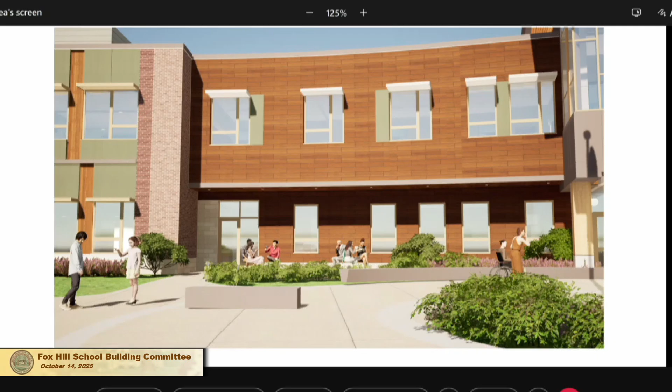This one is showing the elimination of the rooftop mechanical screen that would come off. Martha has a question - we can see your mouse, by the way. Am I correct that those screens are in the back of the building? You're correct. So those screens would not be visible to the public in general? That's mostly for kids playing out back, and it's not even where the delivery people come in, is it? So hardly anyone would see those screens. Correct me if I'm wrong, Neil, but it does look like it's on a roof that is lower than the central portion where you'd see from the front of the building.

Yeah, Martha, it's a one-story roof there, and the kids do play in that area. That's where the outdoor dining potentially is and outdoor learning. But it wouldn't be visible to the public generally? It wouldn't be visible from the parking lot, no. Okay, but if you walked around the building, you'd definitely see the ductwork and the units on the roof. So is that something we're talking about deducting, or? Yes, in theory. Yeah? Okay.

I think it's important to note that all these, maybe with a couple of slight exceptions, should not affect or impact teaching and learning and educational programs. They're very intentional so that they do not impact teaching and learning. So it's a good observation, Martha, on the back side of the building.

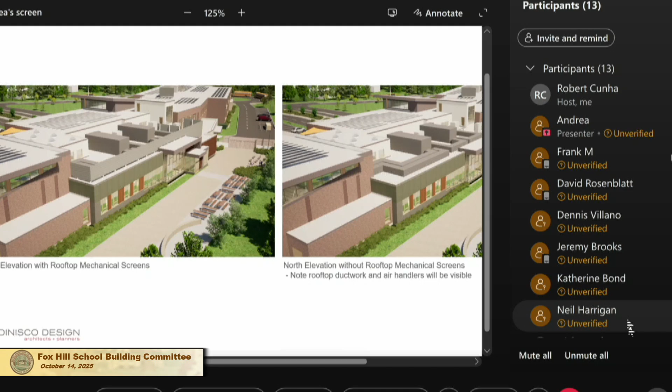Are you talking to me? Yes. I think this is one I would be in favor of eliminating. Not to mix up projects, but all eyes are on us financially - being careful with our money - and this one doesn't strike me as necessary.

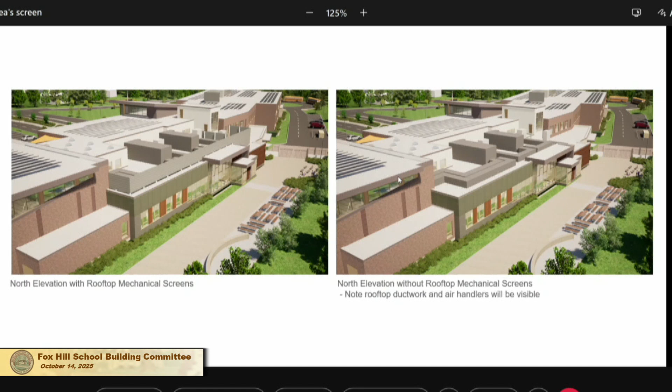So I've had the pleasure of working in a building that has these screens, and I think they're uglier than the units themselves. I don't think they're attractive. I've seen them on other schools too. I don't think they really do much for the aesthetics of the building, possibly sound, but it doesn't sound like there's really much of that benefit, and that would be the only benefit in my opinion. So I would be in favor of getting rid of these.

I didn't raise this earlier, but when you looked at the sunshades, I'm confused - is the idea that we're going to keep them? Martha, they're going to go through one by one. Well, we already did this one, and I'm just concerned - do those sunshades make the building more energy efficient? That's my question, and if so, I think we should keep them.

They do decrease the solar heat gain in the summer, which is a bigger load than in winter. In the winter, you usually need heat from the sun, so it is an advantage. I can't quantify it right now, but I could have our consultants put a number on it.

So is that on the delete list? It's a little hard for me to tell which is in and which is out. I think that one's... All these items are open for discussion.

So this one was averaging about $82,000. If you remove it - it's currently in the project. So all of these are in the project. Everything is in the project.

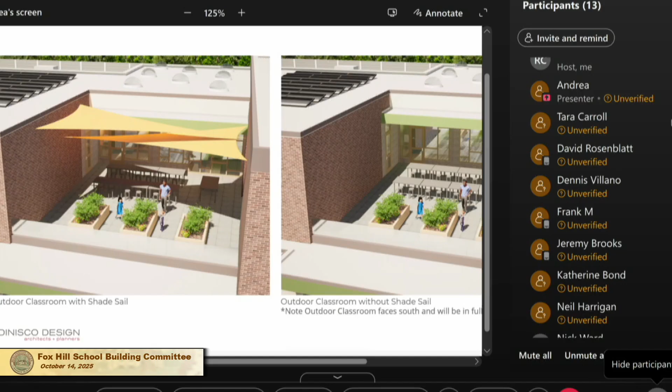Moving on to number 5, eliminating the operable partition at the platform. So that would be this - is it this piece, Neil? This doesn't show it, but it's essentially the opening where the wood is in the stage.

We have an operable partition that closes so that the stage area can be used as a music classroom or any other kind of classroom you'd like. So it would essentially come across right here. Does this help with sound in the cafeteria?

It's an acoustical partition, about STC 50 or so. I think depending on how loud it is in there, you might hear some of it, but the intent was to kind of isolate the two spaces.

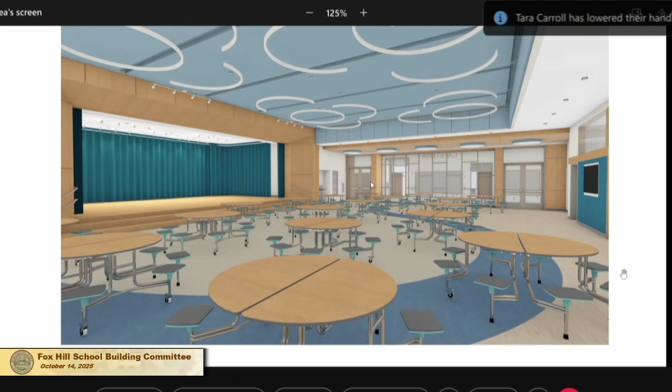My question is with moving partitions, how long do they last, and do you end up not using them anyway? We could spend the money on this and it seems like a good idea, but if it's going to break after a couple of years and we're never going to be able to use it, what would the advantage of it be?

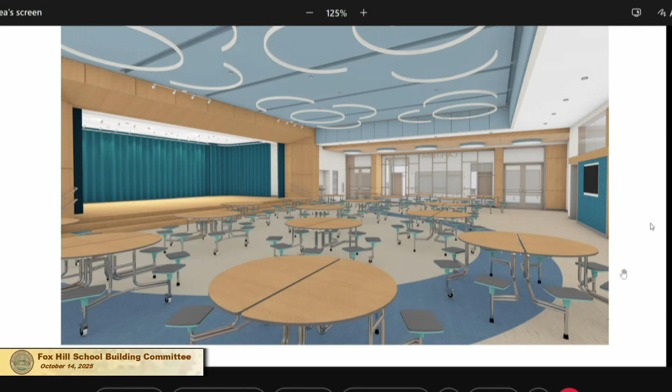I would say we've had good luck with this. It's an electrical motor-driven, continuously hinged partition. They are pretty simple devices, and everything's pretty accessible. We've done it in a bunch of schools, and we haven't heard of any of them breaking down as of yet, but I can follow up with the manufacturer.

Maybe you could give me some statistics on the typical lifespan of them and how frequently they break down. But I think in general they're kind of useful if you want an extra learning space in the school - it's an easy way to do it.

Thank you. And we use their stages a lot, almost every building, as learning spaces. So I would say that's an instructional feature that's already included that I think we should keep.

Is there a curtain on the front of that or no curtain? There's a curtain too, so when you use it for performances, you want to have a curtain. We also have a drop-down rear projector screen in conjunction with a curtain, like a large screen - you could show a slideshow or a movie on it.

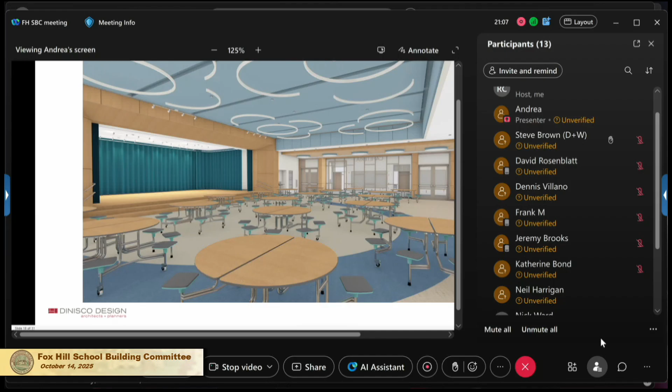Is your hand up related to the stage? Yeah, I was going to piggyback on Dr. Cunha's comment. When I kicked off the discussion on VE, I mentioned there's a few exceptions on programming. This one is kind of a fringe program impact because based on the number of sections of music, we were relying on the stage to have some of that musical instruction space.

And so without that acoustical separation, it would be really hard to do that - the noise and everything will carry right into the cafeteria. So that's why that exists. Yeah, I think currently they have all the strings and the instruments on the stage.

Thank you. My question was about the warranty on the electrical parts. I'm for this, I'm just curious if you don't have that information now, if you could share that with us before we vote.

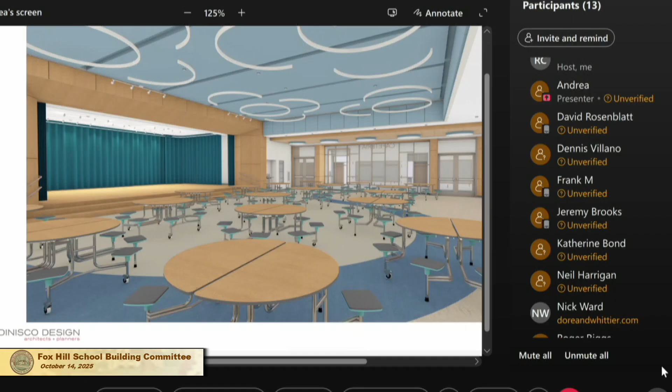I could definitely share it with you, I just have to do a little research. Okay, thank you - get it to you in an hour or less. Thank you. Sure. Okay.

Andrea, the delta on this is roughly 40,000, and the stainless steel is already designed in? Correct, it's a $42,000 delta. The glass is currently in the project - it would be a reduction to go to stainless. No, the glass is in, it'd be 40K less to go stainless, but may take longer.

Correct. Oh okay, I got that backwards. So the glass is the preferable one, that's the one that people prefer? Yes. Okay.

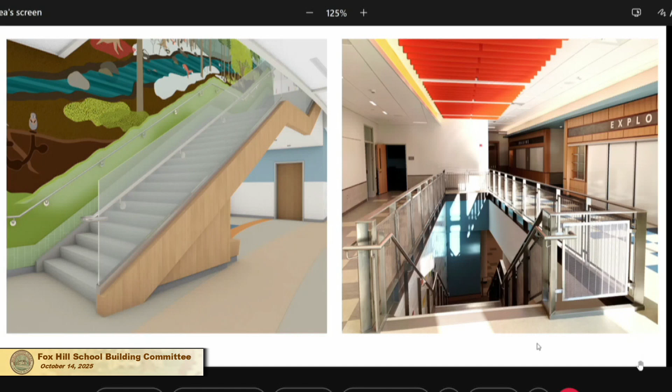Number 7, so we're taking this outside. We reviewed the grounds, and you can eliminate the flat drain system. It's in the project, but if you were to take it out, it would be a savings of around $345,000.

Martha asks: does this affect any of the requirements from the Conservation Commission?

I think I can answer that one, Andrea. I don't think it does. Really, it just allows the field to be used in wet conditions. If you're going to use the fields a lot, that's really useful, it makes sense to have irrigation and drainage.

I think what we heard through the meetings with recreation and school department is we anticipate the field getting used a lot or being available for a lot of town programs. So not only is it really nice to have, but it's been an ask from the committee and groups we've been speaking with. This one may need to be re-reviewed by planning board if it's part of the site and how the drainage works, but it drastically will increase the ability for that field to be used in the shoulder season.

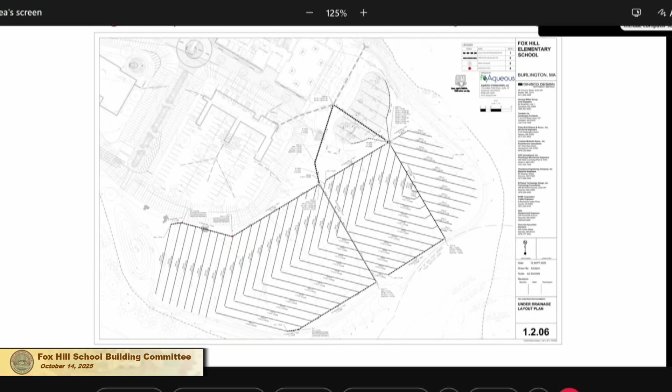Okay, well, let's stay outside with the next alternate to see if Jeremy has his hand up. Oh, sorry Jeremy. Oh, no, down.

So the next alternative option in the field is to eliminate the field irrigation system. It would make the fields less useful year-round. It currently is in the project, and if you do choose to take it out, it would be a reduction of $222,000.

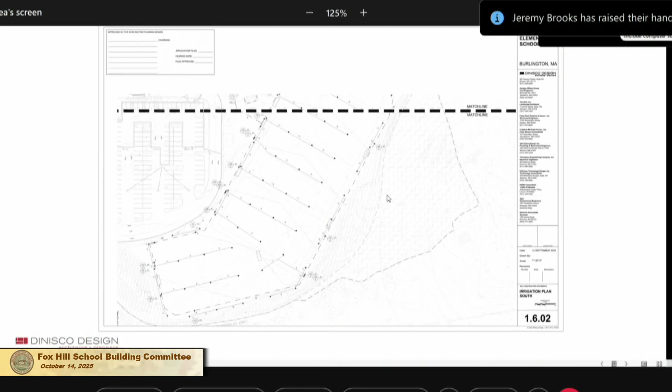Jeremy's hand is back up. I just wanted to make the comment that this was part of the Rec plan, and this is something we've been talking about - the overall scheme of fields for the town was kind of why we added the field as currently configured, with the drainage, with the irrigation, to get that full size lacrosse field. So that was something the folks had asked for, just to get a point of context.

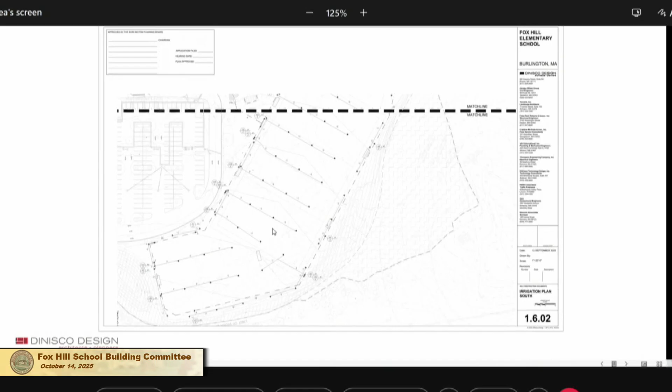Thank you. So what are the rough costs associated with maintaining the irrigation system? So we'd be adding maintenance service or cost right now? Nothing like that right now, unless plans change - Recreation maintains the irrigation system. Okay, so they would incur that cost. From other conversations with Rec about maintaining irrigation systems, it's mostly occasionally they have to replace pop-ups and valves, and it's a fairly low level of maintenance over time.

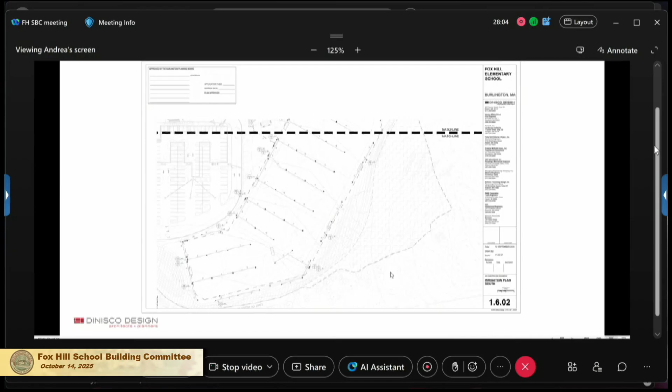And it keeps the grass probably maintained even better than them having to redo it. We have plenty of weeks where there's no rain or no water on the fields, and it definitely helps - yes, the grass would get burnt out in the sun and kind of unusable because it would get torn up. Without both the drainage and the irrigation, you'd have a very unreliable field that was very unreliably available.

Okay, thank you, we'll move on to number 9. This one is eliminating the soccer and lacrosse goals that would be supplied as part of the project. My only comment would be that someone would have to buy them later on. Yeah, and this is again in the project, and I think this is one of our smallest eliminations at $30,000.

Unless you have a source or somebody in town has a source that can get them at a discounted rate below that, it's one of those things - if you were to exercise the option to remove them from the project at this point, it doesn't mean we can't repurchase them through FF&E or that budget later. A lot of these things, usually if we're really trying to get down towards a number to just keep the project alive, to keep it under our budget, we're just in such a different position. And I will be the first to acknowledge the fact that everything going through town meeting with the high school does change the conversation somewhat. But that's why a lot of these are pretty standard value engineering options available, and why it's included here.

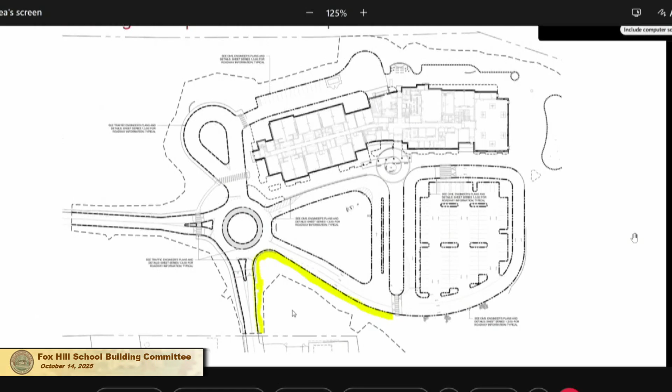The berms don't last, so again, that's been my observation. The snow plows kind of knock them up. So if we have granite now, I would like to stay with it. I agree. Agreed. Granite really is the gold standard, especially where plows are involved here in New England. Thank you.

Again, I'm selfish, I consider that programmatic, so I'd want to keep it. Yes, this is one of the ones that Steve mentioned at the beginning that would affect the use of this stairwell.

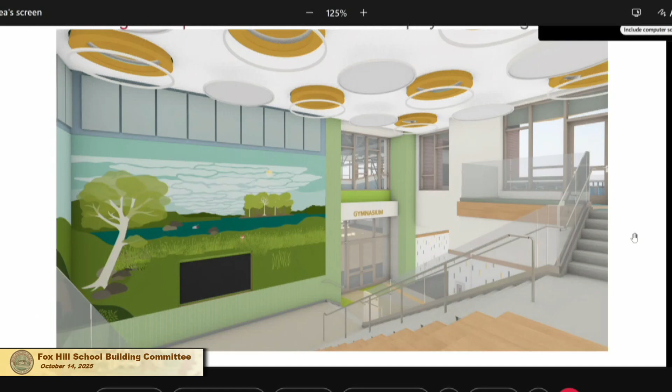Question: is the outdoor learning classroom MSBA reimbursable? It is in the sense that it's tied to the construction of the building. It's not any one particular line item, it's kind of in the construction number. Okay, thanks. It's not, they didn't rule it out.

No, they didn't exclude it, it's a really good point to highlight. As we get deeper into the discussion about whether we're looking at some of these, all of these, or none of these, there's an impact on the grant for the ones that are site related, because of the way the MSBA math works, we're already over our site cap. So if we were to eliminate anything site related, those are dollars the town is bearing 100%, because we're so far above that cap, which is completely normal. That's just the way MSBA agrees to reimburse exterior site work, because it's less tied to educational space. That's where they draw the line in their program. But things in the building and in the construction would very much potentially reduce the grant by their reimbursement percentage on eligible items. Thanks.

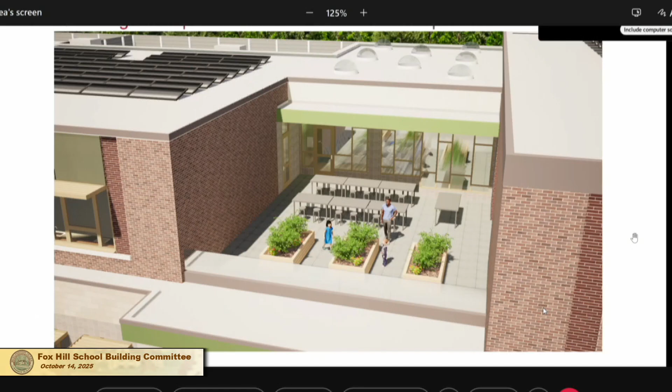I think Jeremy has his hand up, unless it's from previous. Okay, go ahead, Jeremy. We had trouble hearing him last time, so maybe he's out of zone. Put his hand down. Okay. I had my hand up from last time, sorry. No worries, we'll carry on here.

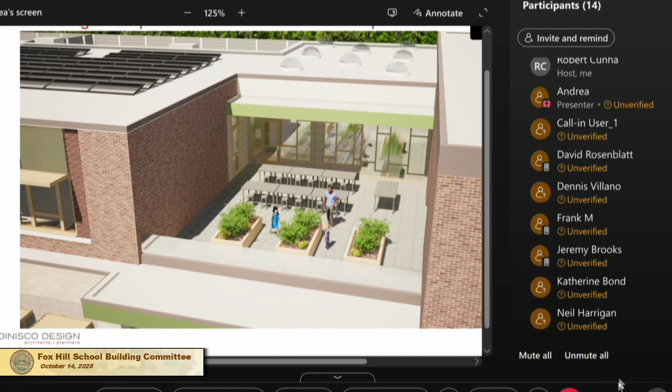So this is not currently in the project. These were the two pricing alternates that were recommended by the site consultants to add. This is additional fencing at the outdoor classroom, which is over here.

Andrea, it's the yellow line. Right here. So this would give the kids a barrier. You do have wetlands back here, and I believe it's sloped as well, at least over here. It is sloped. They were considering balls and things that make their way into the woods and to the runners.

I like fencing. I agree. And this is not a huge cost, we have it averaging about $20,000 to add. What style of fencing is this? It looks like chain link. Yeah, it's a 4-foot chain link fence, vinyl covered.

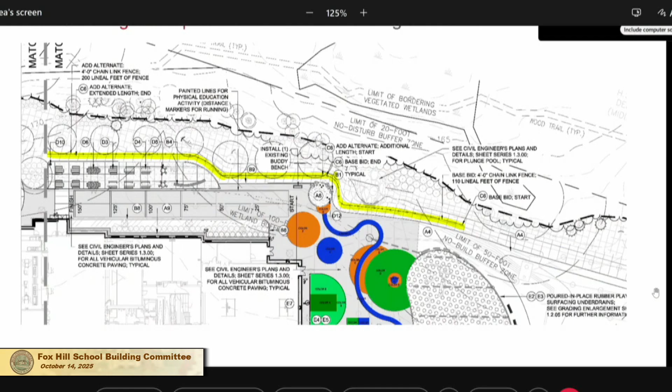Okay, and then we have another fencing option. This is to eliminate the kind of fencing backstop at the kickball field, just to eliminate the need to replace all the playground balls that end up in the woods. That's not really optional. This again is another small add, just $20,000, or reduction. So sounds like that's a good keep. And we do know from speaking with the staff that they use the kickball field all the time.

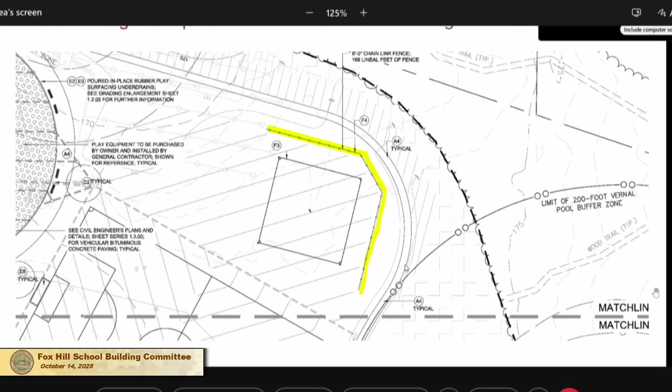So next is the two playground options. We have a delta. Right now we have landscape structures, which is this one on the left, currently priced in the project. But you do have the option of childscapes, which would be a cost savings of about $187,000 if you choose to go with the alternate manufacturer.

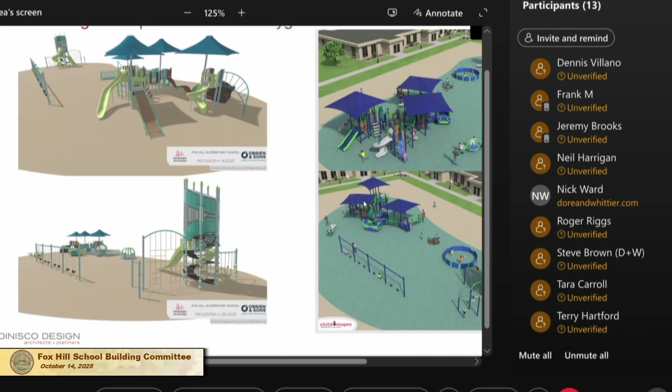Through the chair, I still believe the cost savings in this is important. I noticed, and this could just be something missed in the renderings, I don't see a Gaga pit in the landscape structures. Is that not going to be in that version, or is it just missing? I think there is one in the list of stuff, I'm not sure why it doesn't show up in the rendering. Yeah, I think it's just missing from the picture.

And a follow-up from the previous discussion about the playground at our earlier meeting. DiNisco had to make some design decisions based on one manufacturer versus the other. I don't think it's a big difference, but at least they needed to make that based on one design. The bottom line is that when this is purchased, it's not going to go out for procurement for at least another year, considering this is outside the construction bid number. It'll be procured separately through the state contract, through pre-negotiated rates, which both these vendors are on. So I think we heard a question following, why do we need to make that decision now? Do we have time to think about it? Bottom line is, yes, you have some time. We're rethinking it, and that's why it's on the table again tonight. As I mentioned, this wouldn't be procured and purchased for at least another year. So just wanted to revisit that and let folks know where we stand coming out of the last meeting.

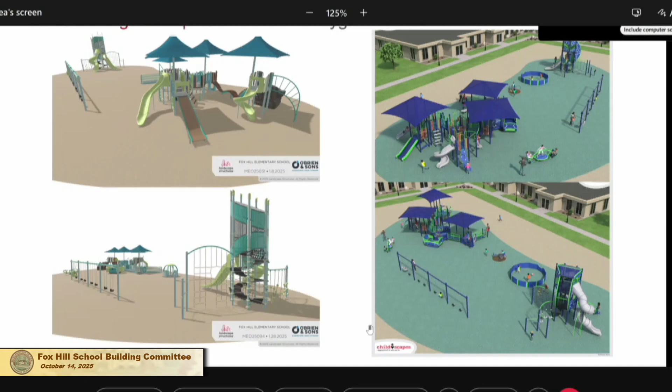And just to follow up, as mentioned earlier, all eyes are on us. We're looking at these projects and making sure we're making choices that are fiscally responsible. And I think both options look great. They're both huge, they have so many choices for students to play with, lots of accessible features, which I love. And I think, if I was looking at this, I think the one that is $187,000 less is just as good, and actually looks a little more engaging color-wise. I'm not sure how anyone else feels.

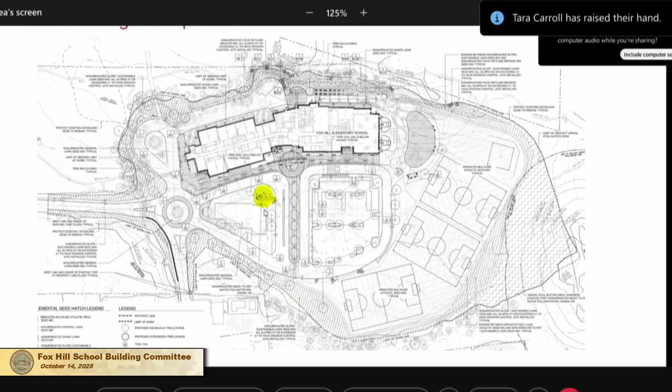Through the chair, will we see a rendering of what it actually looks like when we go to decide whether or not we're going to move forward with the human sundial? I'd like to see what it looks like. I don't really get a whole lot from a yellow dot, respectfully. Yeah, absolutely, we were actually looking at the contract drawings, which had quite a bit of detail, but we can get that to you in the meantime. Thank you.

Tara raised her hand. Oh, go ahead, Tara.

I think I'd have to see this too to understand it, but it sounds like something that might only be used once, like if a teacher takes a classroom out there and explains it and uses it. It's pretty far from the school to take a whole classroom out there. So again, I'd have to see it to think through if I would use it as a teacher, or how many times I would use it per year. But it sounds like it could be something the kids are taught about once or twice and might not be brought out to again, but the Science Center would probably disagree with me. Thank you.

So 16 is an alternate that we had discussed previously, it was replacing the standing. Chris, do you have your hand up? Yeah, Chris, raise your hand.

I just wanted to ask, what is the price of that human sundial? 68,000. Yep. 60,000? Almost 70. Oh, well, I'm kind of thinking we may not need that, but that's just my opinion.

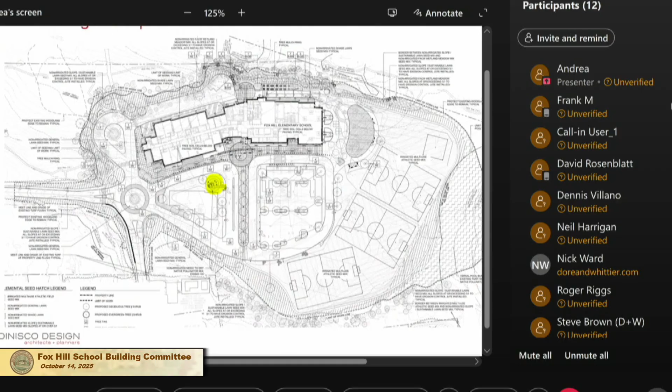In the interest of time, I think we just have one more. This is replacing the metal roof, which you can see as you're driving onto the property, with a PVC top on the media center. We proposed this because it looks better. That was an addition we made in July. Not huge price-wise, it's $76,000.

Andrea, didn't it also have a longer life? Yeah, I believe metal does last longer. The metal will last longer too, actually. It's probably more like a 50-year life.

I'd also note that changing this will require a lot of redesign work, so it could push the bid date out if we have to change a lot of stuff. There's detail at the roof edge and a lot of trades to coordinate. No disagreement there, Neil, at this stage of the game.

This was, I think Andrea mentioned, an option at DD or 60. This was at 60, yeah. So about six months ago we looked at where the budget was, and with favorable market conditions, it wasn't a big add to get peace of mind and longevity up there, which on a roof is a no-brainer. So that's why it's in.

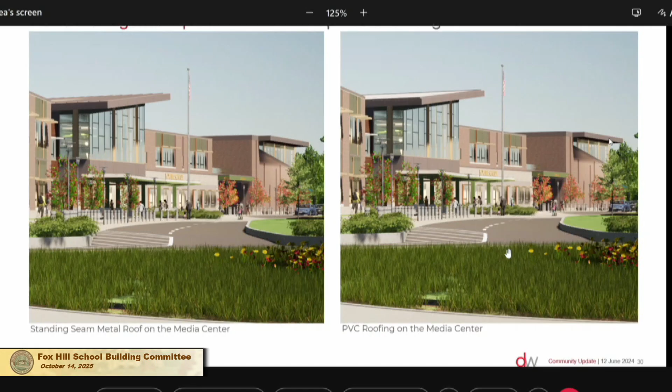Does anybody want to go back and review anything while we have Dennis go on right now, or wait for the follow-up presentation? Chris, do you have your hand up from last time? Probably. Okay.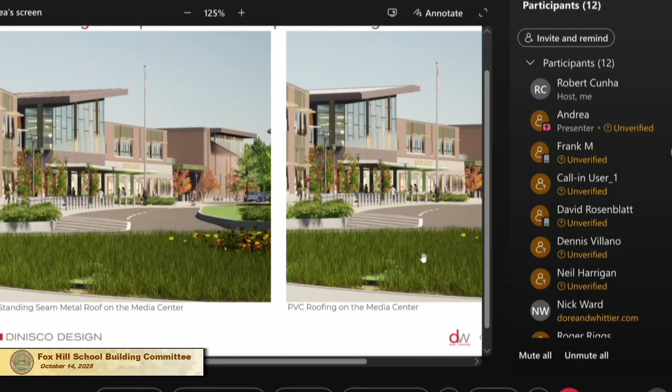Andrea, will we have the 90% number ahead of making these decisions? Yes, we have that. The reconciled numbers came in Friday. The 90% number is right here: $73,950,700.

And Steve, does that keep all the current contingencies as well? It does. In fact, it increases your construction contingency even further. Right now at 60%, we had moved that $4.2 million down to construction contingency. I think what we typically hear in public projects is, oh, you just put the money in contingency, you're going to spend it on something else. Well, we haven't, right? That's why we're going through this value engineering process.

So we had some reductions and additions. We're not making the recommendation to earmark that for anything specific, it's purely in the budget. It's what was approved at town meeting and gives the town the authority to borrow. But money not borrowed is money not spent and doesn't have to be paid back. So we're not suggesting to put it into anything specific other than a contingency, in case market conditions change on their head in the next month or two. It just provides further cushion for project unknowns, which we've narrowed down quite a bit.

So it's purely there as a contingency, and that's our recommendation, to just move it down to contingency. So we'd be around 6 million, from where we were at SD.

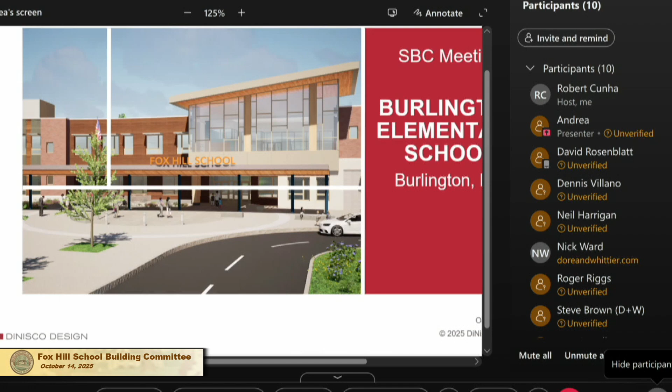And we would have to design some of them, so that would require additional time if we had to do two designs, for instance, of the guardrails or something.

I didn't make a slide for it, but any other topics? We have 4 minutes.

I just wanted to follow up on the operable partitions. I did look it up - it's a 10-year warranty on the products and a lifetime warranty on the hinges. Thank you, Neil.

Is there any public on? Let me look here. No.